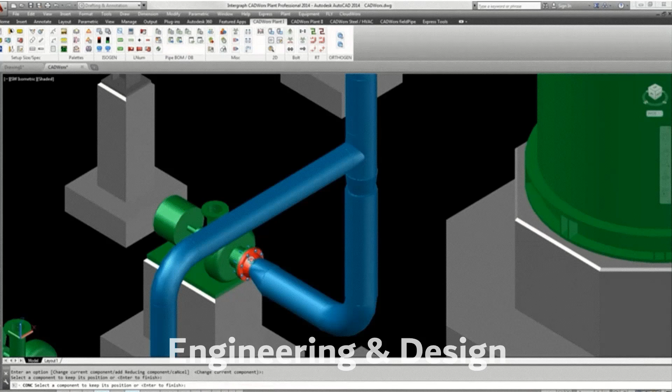Industrial Construction, a Handbook, and Manpower Planning for Multidiscipline Construction Projects describe how an industrial project, particularly if process plant is involved, differs from the average building or civil engineering project. This video attempts to complement those words with visuals and a few more observations added for good measure.

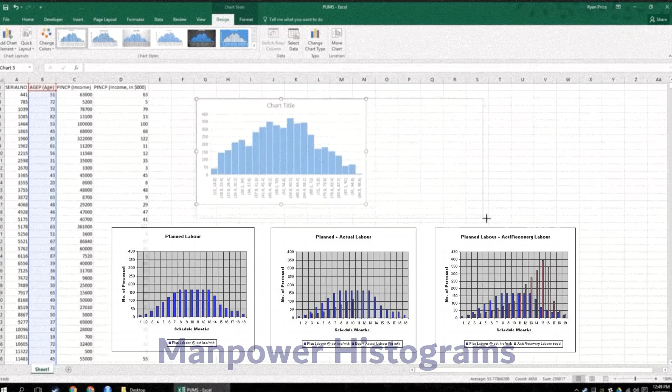In summary, most industrial-type projects do involve significant, if not substantial building and civil engineering works, but only as a base for what is to follow in terms of steel structures, tanks and vessels, machinery, piping, electricals, control instrumentation, and protective cover. Indeed, to put matters in perspective, as a ballpark indication, it is quite normal for the civils and buildings scope of works, in materials, construction equipment and manpower terms, to be no more than 25% of the total value.

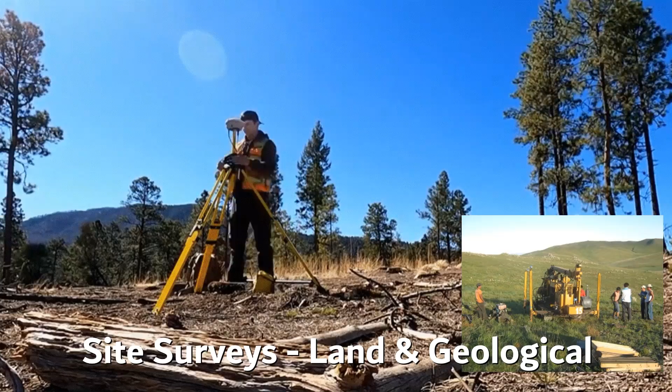Site preparation operations, namely clearing, earth moving, leveling, grading, compaction, etc., will always be fairly conventional, but civil works often involve more complex requirements when time comes to excavate and construct concrete foundations, sometimes in large numbers and a wide variety of sizes and configurations.

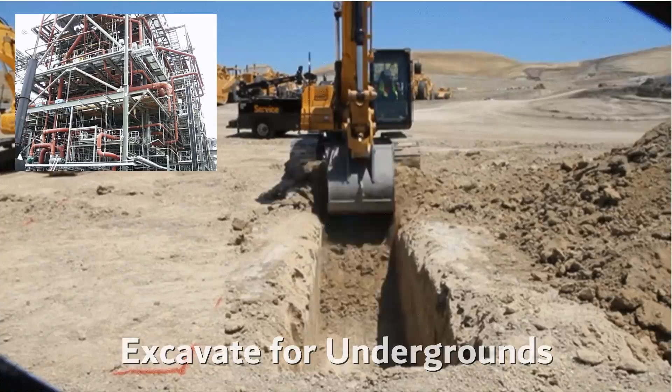Invariably, a number of conventional steel-framed buildings are required, but the bulk of steelwork in the scope of an industrial project will usually be large structures containing several levels of machinery operating areas, and the access platforms, ladders etc. required, for multiple very tall vessels, or towers, adding up to hundreds if not thousands of tons.

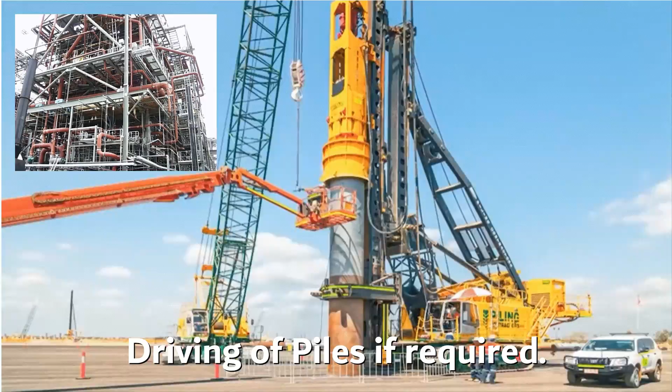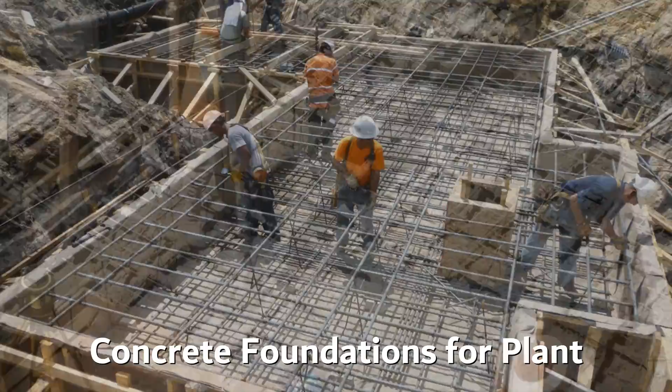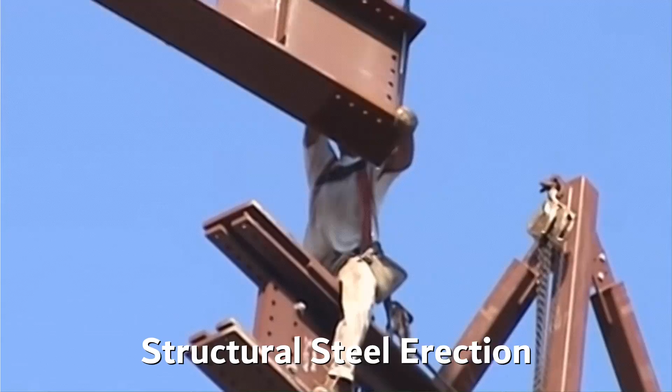Basically, industrial construction can be described as a numbers game, where, in addition to the steelwork, lengths of pipe and power cables required can be measured in the tens of thousands of meters, pipe fittings and valves etc. equally in their thousands, together with, of course, large numbers of people with a wide variety of skills who must be mobilized to install same, all within very tight timescales. For example, as construction director for a refinery expansion in Malaysia, my site workforce peaked at 7,000.

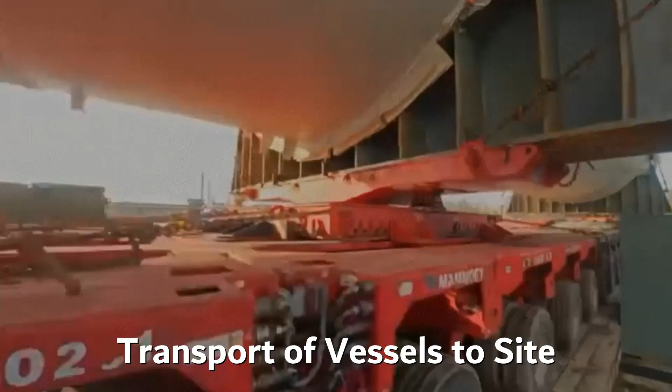Getting back to timescales, it is important to note that although the nature and complexity of a small industrial project will nearly always be similar to that of a large undertaking, particularly where the product might be the same, timescales from go-ahead to commissioning can vary considerably. For example, a small chemical plant might take 12 to 18 months, whereas a large plant with the same product might take 3 years or more.

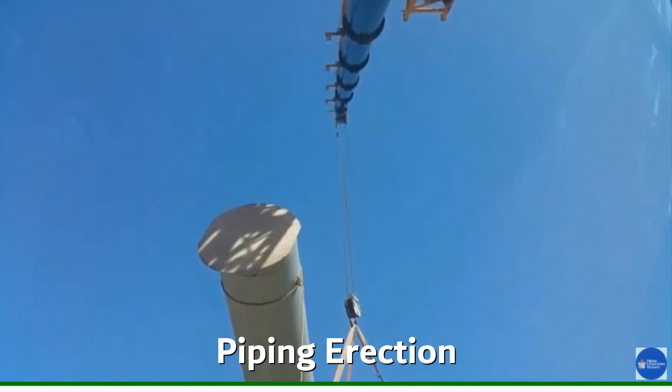Obviously, the successful on-time completion of any construction project depends on getting materials and resources on site when they are needed, but particular attention to detail has to be given during the piping, electricals, instrumentation, protective coatings and testing phases, during which time, things can go so badly wrong.

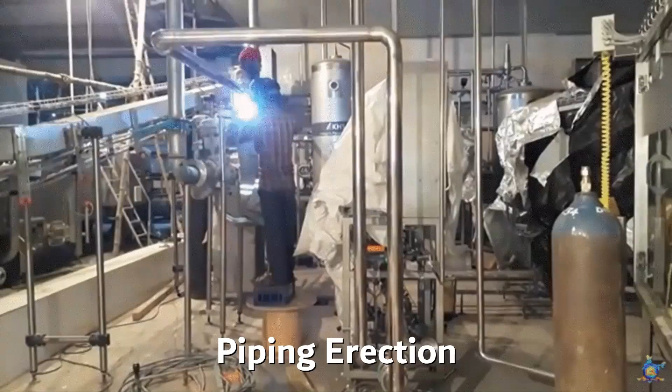Industrial Construction, a Handbook, includes a series of calculators, called e-tools, designed for use by anyone directly involved with such multifaceted projects, anywhere in the world. A unique URL in the cloud is provided for each numbered e-tool, together with an explanation of its purpose, plus examples illustrated by screen clips, and guidance notes on their usage.

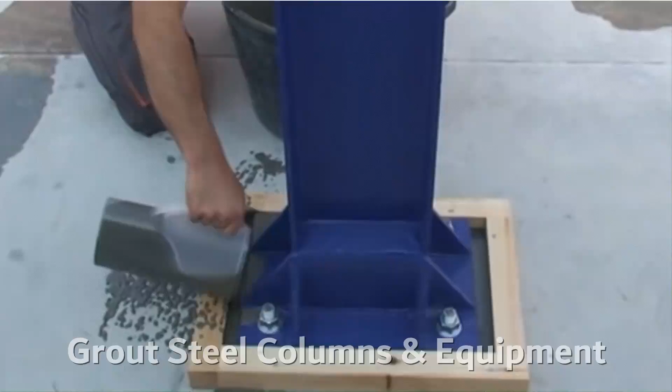E-tools are particularly suitable for preliminary estimates of man-hours, quantities and costs, planning of the works and manpower requirements, monitoring progress and taking such corrective actions as might be necessary. They're also useful for education and training programs, or for use by anyone who might be indirectly involved, but who doesn't have hands-on experience of site work, particularly during the closing months, weeks and days when overruns of schedule and cost often jeopardize a successful outcome.